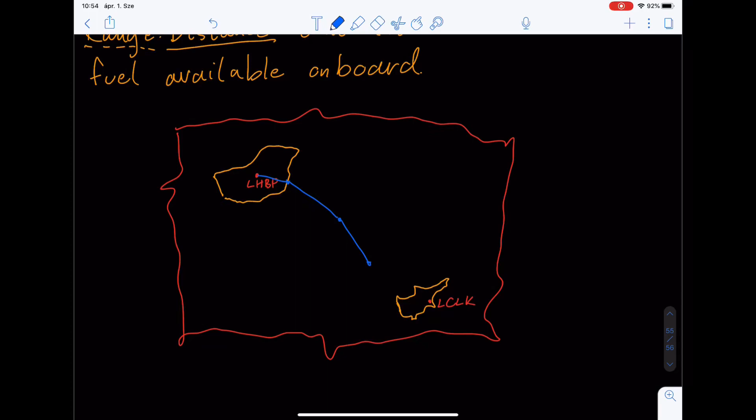So when you plan a flight, in the flight planning stage, you would look, for example: you're in Hungary, I'll try to draw the best Hungary that I possibly can, and you're taking off from Budapest, and you're going all the way down to Cyprus. So you plan this flight on the map, as a two-dimensional image. Of course there's a whole bunch of other countries in between. The point is that you're taking off, you go through other countries, through a whole bunch of points, and you end up landing at your destination.

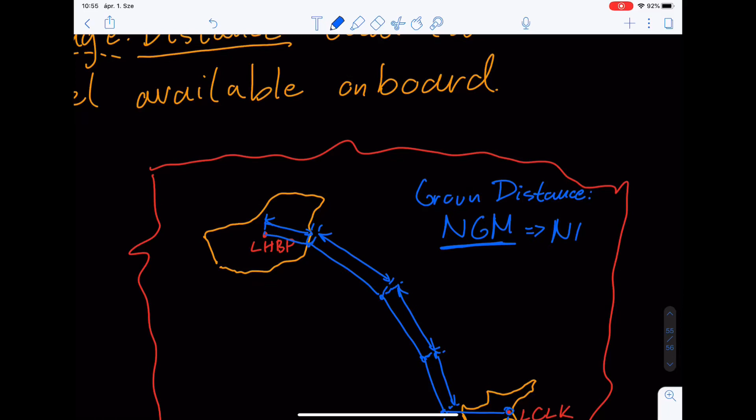So what you do is measure these individual distances and you add them up. And then you receive a distance. We call these distances measured on the ground, so this would be a ground distance. And we usually measure the ground distance in what is known as nautical ground miles, so basically nautical miles measured relative to the ground. Initially this is what we're interested in. We want to fly from A to B, I measure the lengths of the different legs on the chart, and this is going to give me nautical ground miles. So this is the first type, a ground range of the aircraft.

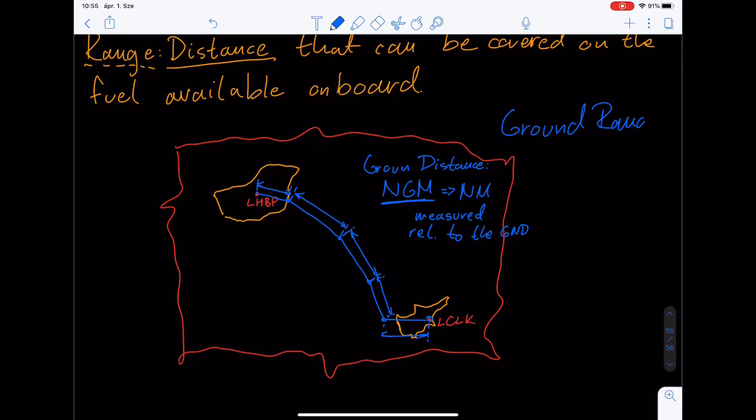And these are the two ones which we need to measure together, like the ground range of the aircraft. Can it cover the ground range or the ground distance from the A to B flight, right? So these distances, can it cover it? If it can, of course, you can fly to this aerodrome. It's still within your ground range.

But in reality, the airplane is not flying on the ground. It's flying in the air, right? And the aircraft is within the air mass, so this mass of the atmosphere, it's made up of the air particles all around, and the airplane is flying within that. It's flying within this air mass. However, this air mass too moves relative to the ground.

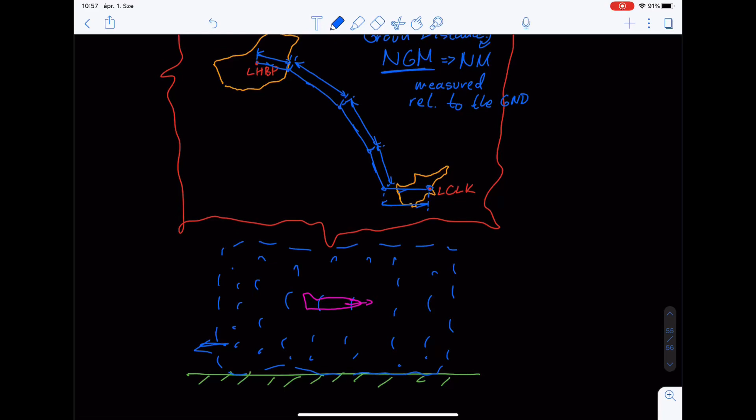So the aircraft usually flies a distance within the air mass. However, based on the type of wind, in this case we show that the aircraft is moving from left to right relative to the mass of air, and the mass of air is moving on this little drawing from right to left, right? You can see that here. So it's a headwind component for the aircraft.

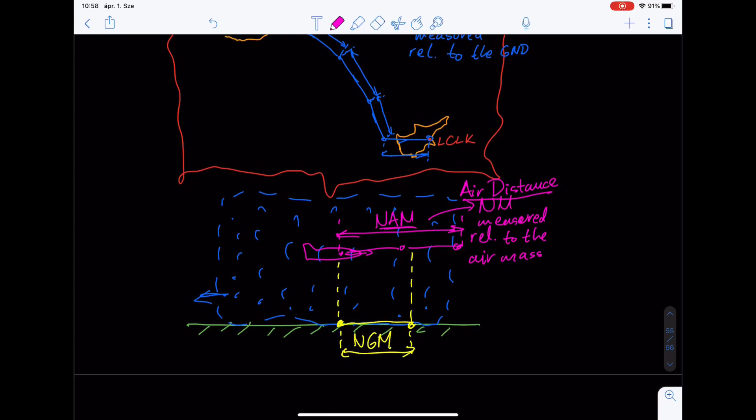So relative to the ground, when you add up these two motions, you would get something like this. So your displacement relative to the ground, this would be the nautical ground miles, and this would be the nautical air miles. So the distance, nautical mile measured or covered relative to the air mass, right? That's nautical air mile. And so therefore this is going to be an air distance. Air distance is the motion of the aircraft relative to the air.

And usually this is the one which we will be able to calculate initially, because this is only dependent on the aerodynamic properties of the aircraft, the type of propulsion, and basically the variables of the environment, like outside air temperature, pressure, altitude. So therefore, usually the density, right, and also maybe the humidity.

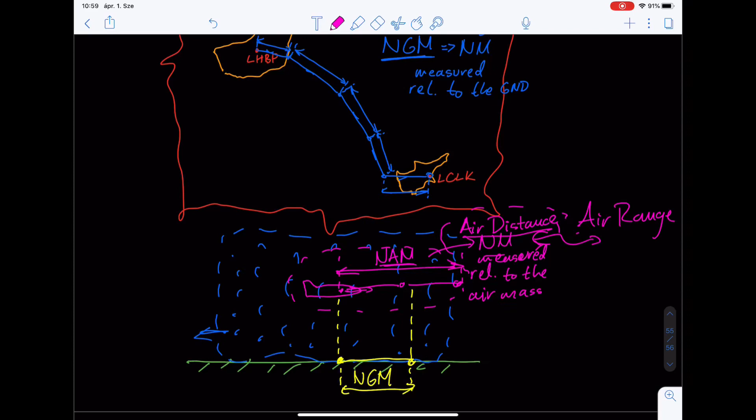So we usually calculate first this air distance, which is also going to give us like an air range, and we compare it to the ground range, which is given by the planning stage. And we also call this ground distance or ground range. We also call this still air distance,

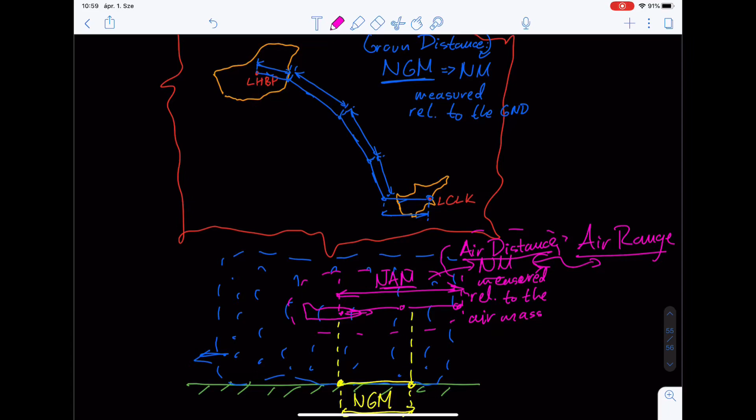because if there is no wind, if the mass of the air in which the aircraft is moving is not moving relative to the ground, in that case, the motion of the aircraft against the air mass is going to be the same amount relative to the ground as it is relative to the air. So in that case, the two would be the same, right? So the distance which the aircraft covers relative to the ground would be the same as the distance the aircraft covers relative to the air.

However, there is always some wind, especially aloft. Even if it's almost a calm wind situation near the surface, because of the boundary and the surface friction effect, at higher altitudes there's usually some sort of wind, which is usually much stronger. And so therefore, in almost all cases, we cannot neglect the effect of the wind.

Okay, so when it comes to range, as we saw, there's going to be two types of ranges. The first one is the so-called air range, and is measured in nautical air miles. And the second one is the ground range, which is measured in nautical ground miles. Okay, so these are the two ones.

So range is a very general term, and as you can see, it's highly dependent on the fuel available on board. So it's dependent on how much fuel you take with you. So in a general consideration, it doesn't really give us much information about the capability or the performance of the aircraft, I would say, right? It's not giving us much information because it's heavily dependent on how much fuel you have on board.

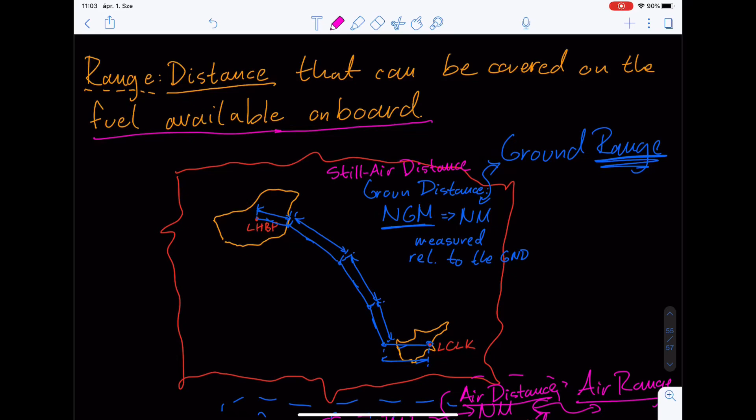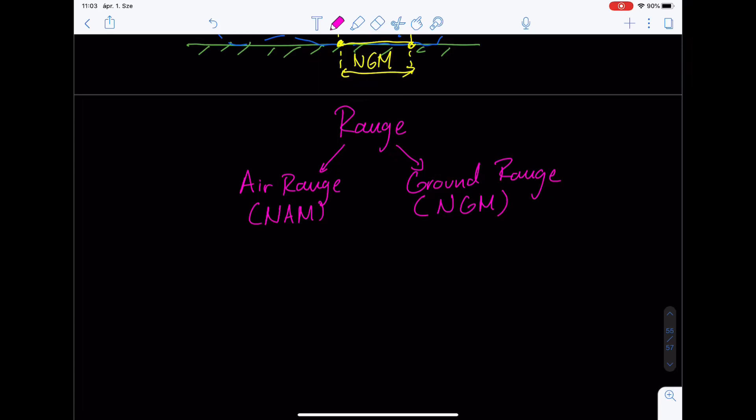And this is the reason why we have expanded the definition of range a little bit. And instead of using simply the range, there is a definition known as the specific range. So the next definition is the specific range, and by definition it is the distance flown or covered per unit amount of fuel.

And this is more interesting for a given airplane, right? It's going to tell us, from a unit amount of fuel, how much range can I cover? So it's a pretty good indication of the performance of the aircraft, right? Because if the specific range is high, it means that I can cover a bigger distance from the unit amount of fuel. So therefore, it doesn't matter whether I bring little fuel or more fuel. Of course, it's going to affect the range, but the specific range should be pretty consistent.

And you know, the better airplane would have a better specific range. And that's a caveat. If you have a lesser specific range, it means you might have to fuel more on that given airplane with a lesser specific range to get the same amount of range, which is going to cost a lot of mass.

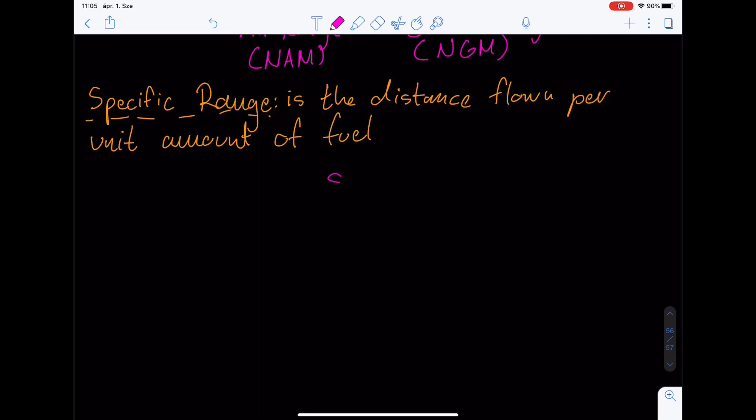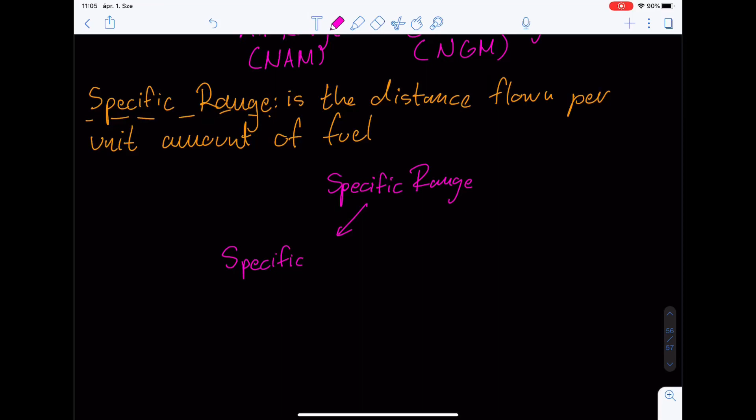So based on the type of range that we're talking about, the specific range as well, we can basically split it into two categories. So there are going to be two types of specific range. There's going to be the specific air range. Specific air range is usually abbreviated as SAR, which is measured, well, we're going to see the unit in a little bit, in nautical air miles per pound or kilogram of fuel, basically.

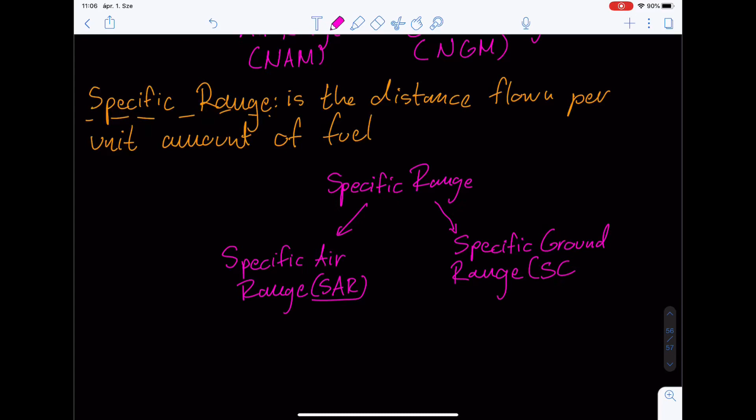And we're going to have the specific ground range, which we're going to index as SGR, specific ground range. And the unit for this one is going to be nautical ground miles per pound or kilograms of fuel. Right. So as a general dimension, you would have the specific range. So this is neither air nor ground. This is just the dimension.

So the dimension of the specific range would be nautical mile per kilogram, right? So it's the distance you can cover from the unit amount of fuel. It tells you how many nautical miles the aircraft can fly from 1 kilogram of fuel. So what we're gonna do next is divide by time, both sides, or multiply with 1 over time over 1 over time. So it's basically multiplying with 1.

So what we're gonna do is nautical mile over time over kilogram. Well, instead of time, because this would be dimension analysis, let's use hour. That will be the System International. Well, no, the System International would be the second, but let's use hours. So nautical mile per hour over kilograms per hour. Okay, so what we're gonna get. So nautical mile per hour is a distance over time.

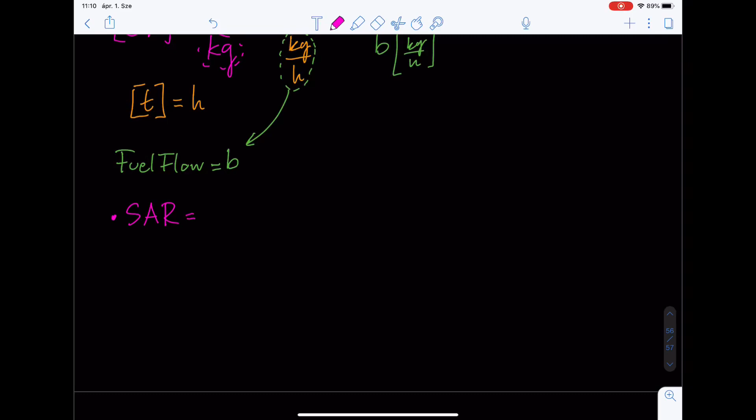So how can we take it further for the specific air range and the specific ground range? For the specific air range, what is the velocity against the air mass? Which velocity of the aircraft can be measured against the mass of air in which I'm flying? It's going to be the true airspeed. So the specific air range is going to be the true airspeed over the fuel flow, which gives us back the initial dimension analysis.

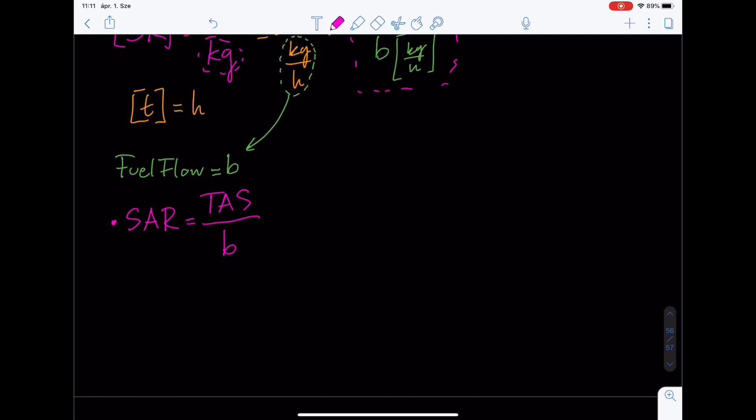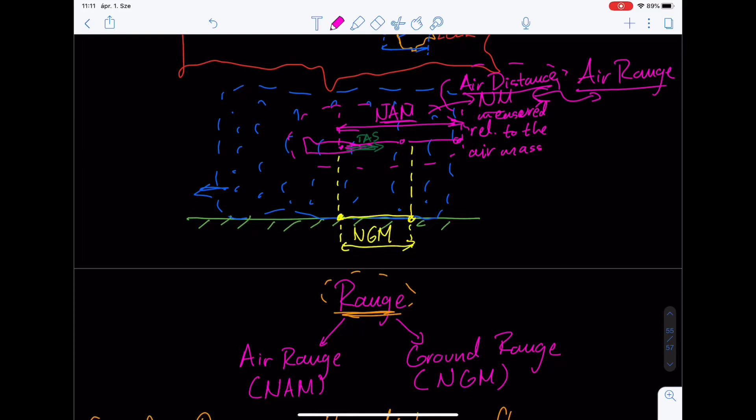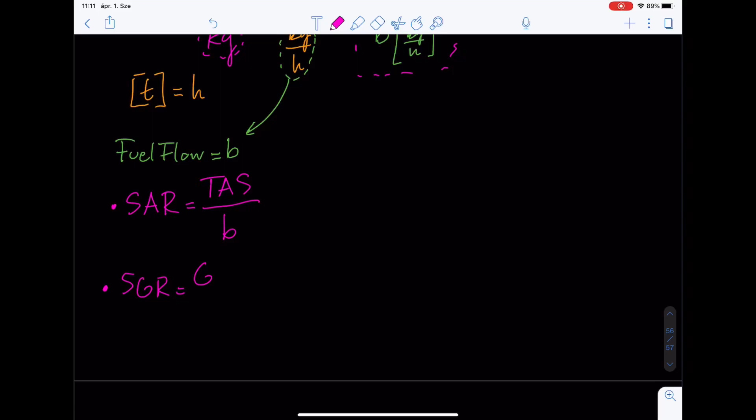And on a very similar analysis, the specific ground range is going to be a velocity relative to the ground over the fuel flow. So which velocity do we usually have relative to the ground, which takes into account the wind? Of course, the ground speed, the speed of the aircraft measured relative to the ground. So it's the ground speed over the fuel flow. This is the formula for the specific air range, and this is the formula for the specific ground range.

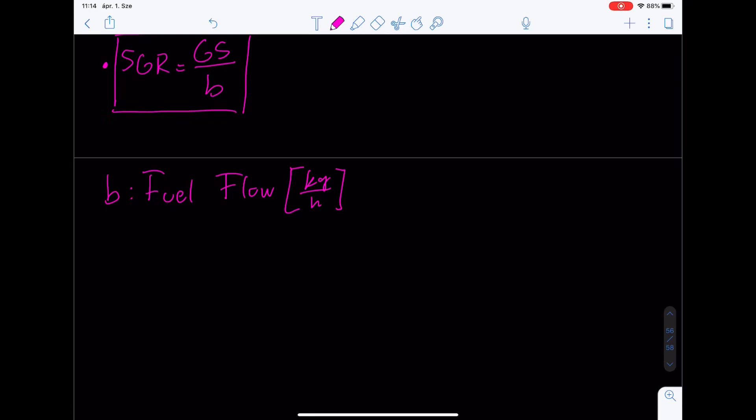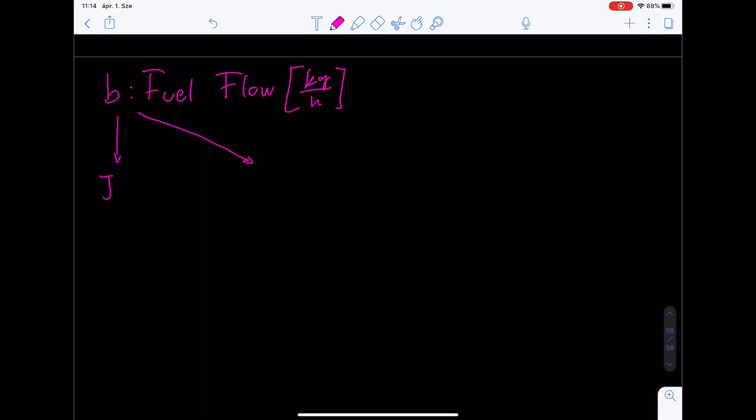Okay, so let's talk about the fuel flow, whose dimension was kilograms of fuel per hour. Generally speaking, how we express this fuel flow is going to be a little bit different for the jet and for the propeller-driven aircraft. So we'll have to make two distinctions again here: one for the jet, and the other for the propeller-driven aircraft.

Right, so for the jet, this fuel flow is going to be proportional to the thrust which is generated. And for the propeller-driven aircraft, this fuel flow is going to be proportional to the power. And the main function of this fuel flow is the specific fuel consumption for the type of aircraft, and we'll see this in a short bit.

So in both cases, it's always a function of the specific fuel consumption of the aircraft. But I think it makes sense why, right? How much fuel is the aircraft consuming is going to be determined by the specific fuel consumption of that aeroplane, basically of the type of engine. So a better, more efficient engine is going to have a lower specific fuel consumption and a lower fuel flow.

And if you look at the previous formula, if you lower the fuel flow for either case, you're going to get a higher specific range, which is great because it means that for a unit amount of fuel, you're going to be able to cover a bigger distance, more nautical miles. And a more outdated, less efficient engine would have a higher specific fuel consumption, so therefore a higher fuel flow, right?

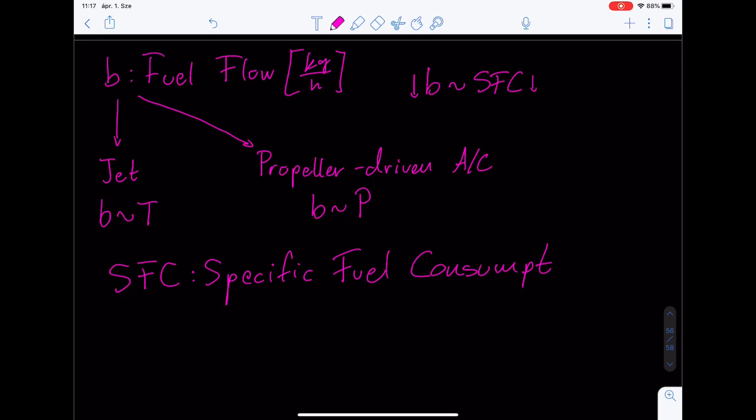And again, for the jet, we usually look at the thrust specific fuel consumption. And for the propeller-driven aircraft, we're looking at the power specific fuel consumption. So usually we say SFC, specific fuel consumption.

We like to use specific for everything, because you could say my aircraft is consuming 200 kilograms of fuel per hour. Is that good? Is that bad? It depends. If it's a little Cessna, it's probably pretty bad. But if you're talking about a jumbo, it's probably not even enough, right? So 200 kilograms of fuel consumption doesn't really tell us much.

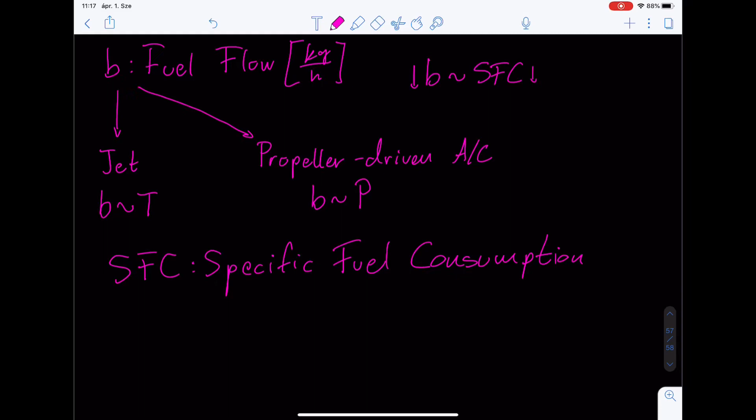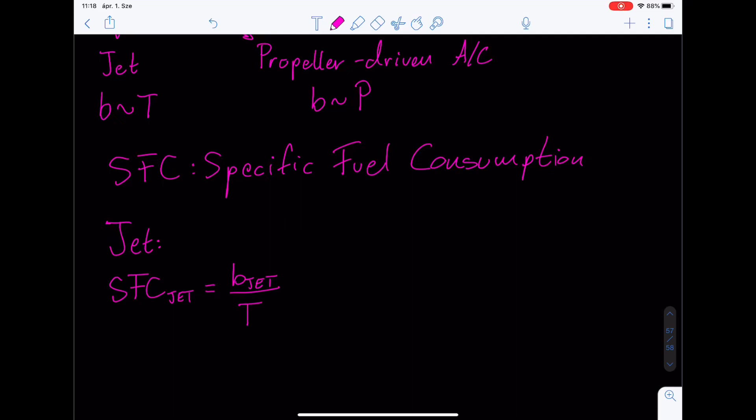So this is why we're using the so-called specific fuel consumption. The thrust specific fuel consumption for the jet is the fuel flow, which we're also going to index as the jet, over the thrust. So how much fuel flow, in kilograms per hour, do I need to get a unit amount of Newton?

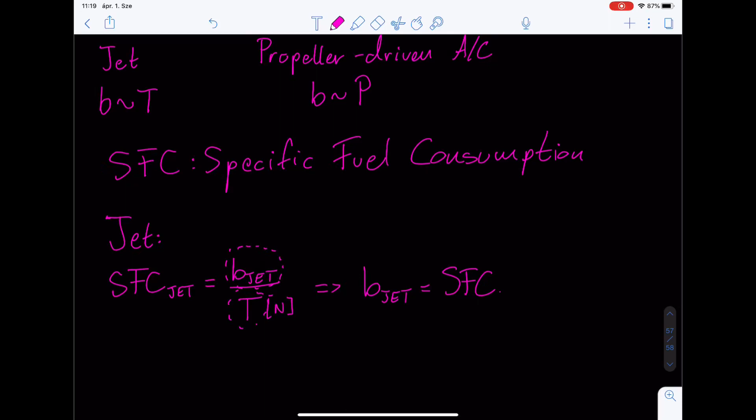And of course, the lower the amount of fuel flow with which I can generate the unit amount of thrust, the better. And this is independent of the size of the aircraft, because if you want to get the fuel flow out of the picture, the fuel flow is going to be the specific fuel consumption for the jet times the thrust.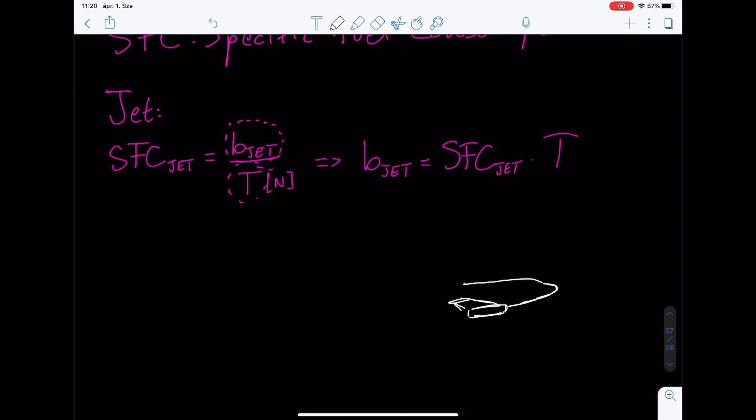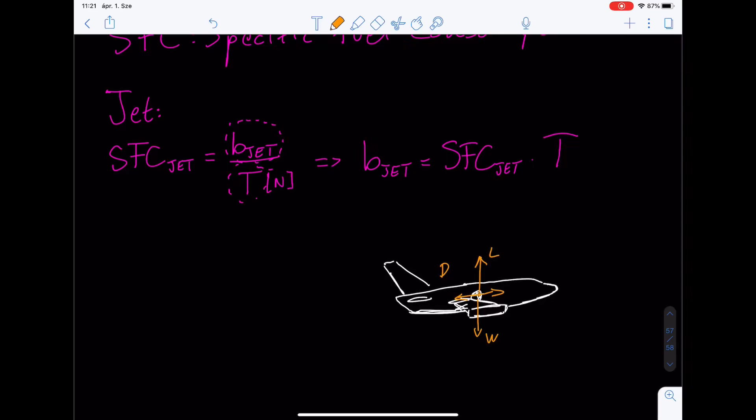So let's look at the example of a teeny tiny 737-200. It has this very cigar-looking engine, and it's kind of a small airplane. It has a center of gravity and a given, little weight. For that weight it needs to generate a given amount of lift, which generates a given amount of drag, and this drag needs to be counteracted with a given amount of thrust.

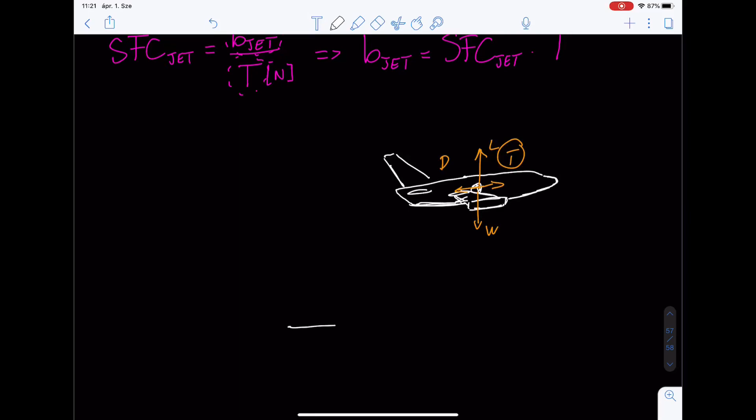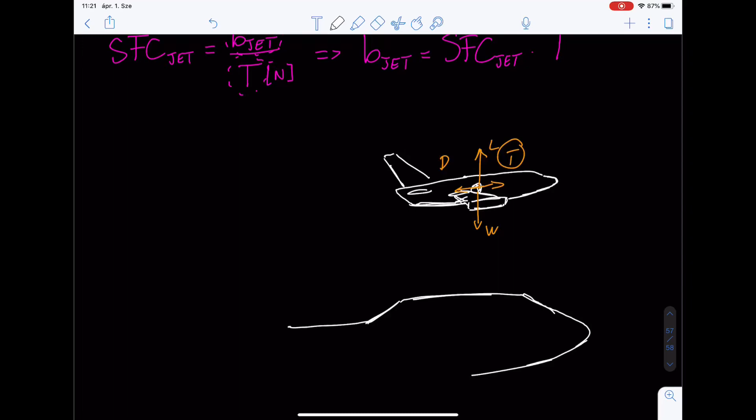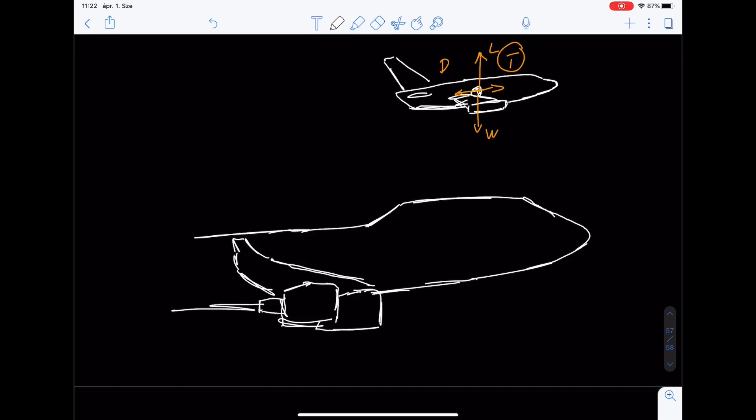But let's look in comparison, and I'll try to get the sizes right, at a 747. I'll try to get the shape of the nose right. And it's this very huge airplane. I cannot stress the size here. It's probably even longer; it cannot even fit on the picture. It's that big. And these are the same metrics used for both of them.

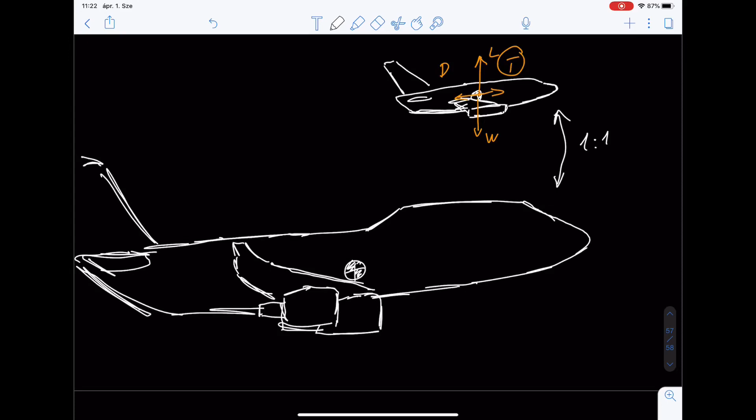So it's going to have a center of gravity as well, and its weight is going to be much bigger. So it needs to generate a larger lift force, therefore a larger drag, and therefore a larger amount of thrust. So the thrust for the 747-8I is going to be much larger than the thrust generated by the 737-200. The thrust is larger, so therefore the fuel flow is going to be larger.

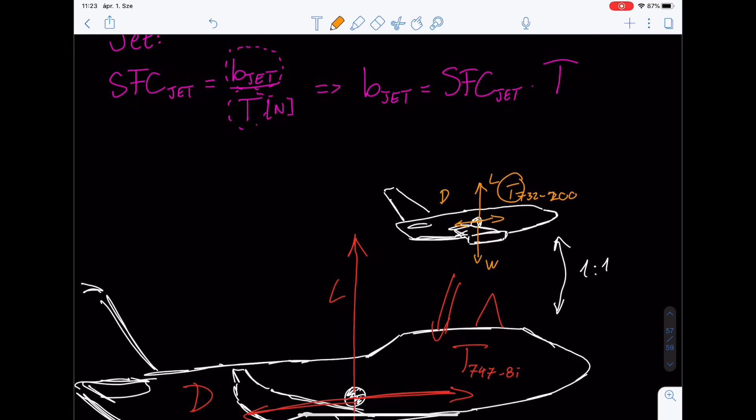Right? So if you want to compare them, if the thrust of the 747 is larger than the thrust of the 737, what you're going to have is that the fuel flow of the 747, which is the specific fuel consumption times the thrust of the 747, is probably going to be higher than it is for the 737, which is the specific fuel consumption of the 737 times the thrust generated by the 737.

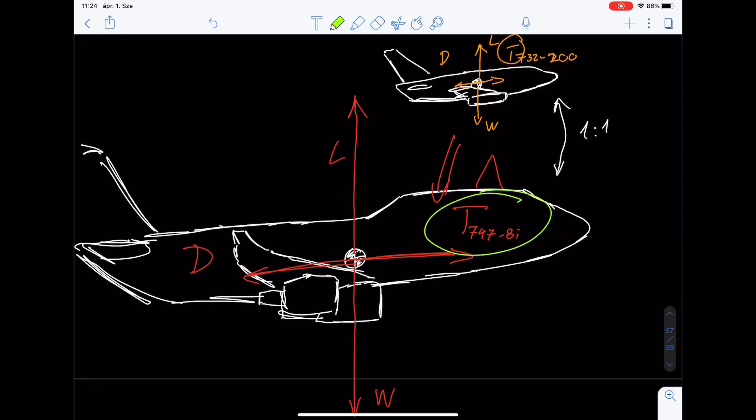Right. So in reality, you can see that the fuel flow is going to be much higher. So it's going to require higher fuel flow to generate this amount of thrust. However, the specific fuel consumption of the 747 might be lower than the 737, because this is the newest type of 747 engine, and it's very high tech, very high bypass ratio engines, very efficient.

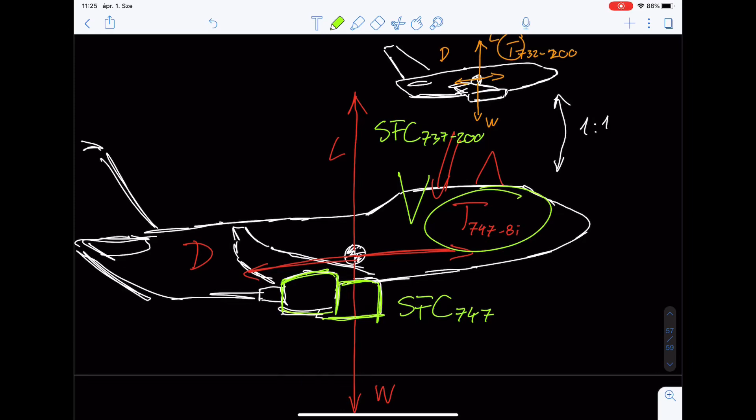So actually, it can so happen that the specific fuel consumption of the 747 is actually less than the specific fuel consumption of the 737-200, which was very outdated, mind you, with these very old, very nasty, very loud single bypass or single spool engines, basically. So in that case, the fuel flow is actually higher. However, the specific fuel consumption is lower than for the 737. The thrust is so much higher than that required for the 737 that the fuel flow is going to be higher.

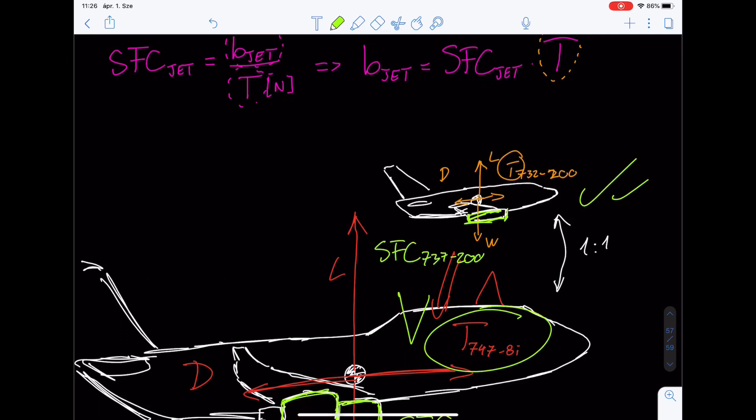But if the fuel flow is higher, it doesn't mean that the 737 is more efficient than the 747-8. It just simply means that there's more fuel required, kilograms per hour, to generate this amount of thrust. However, per unit of thrust, the specific fuel consumption of a larger airplane might be more efficient. It simply requires more units of thrust to maintain straight and level flight. So if you multiply that by the thrust required, you're simply going to get a higher fuel flow.

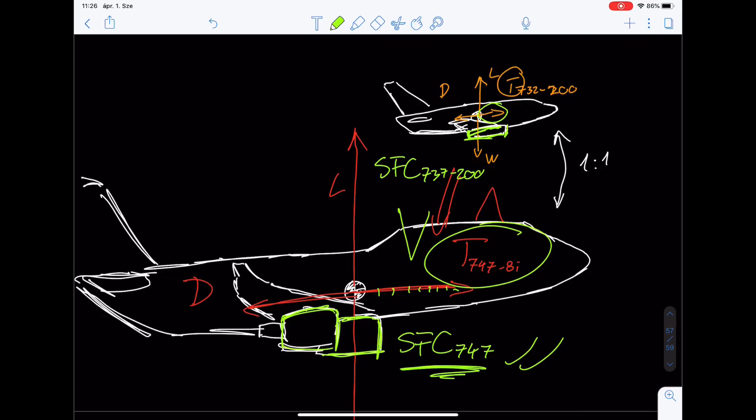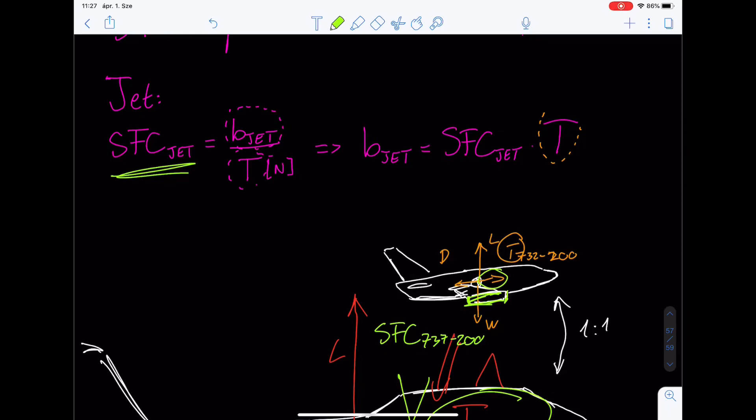So by itself, the fuel flow doesn't give us a direct indication whether the fuel consumption of the aircraft is efficient or not. This is why we use the specific fuel consumption. Okay, I hope that makes sense. So to get back to our initial question, this is why we're talking about the specific fuel consumption for the jet with regards to the thrust, also known as thrust-specific fuel consumption in engineering. In the ATPL, you're not really gonna see it as such. It's just gonna be said that the specific fuel consumption for the jet is the fuel flow specific to the thrust, so divided by the thrust.

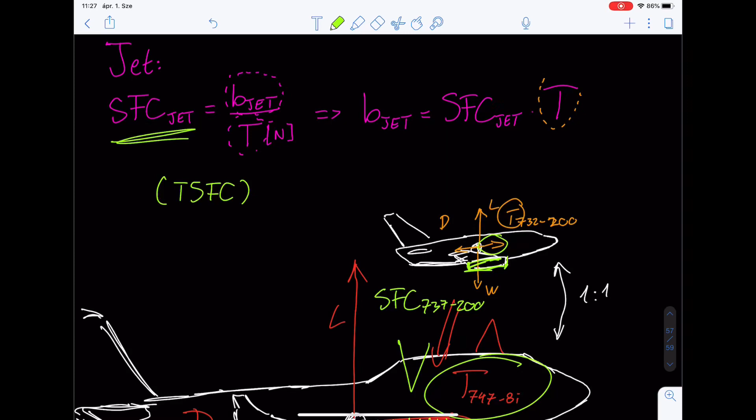So again, fuel flow, kilograms of fuel per hour, over the unit amount of thrust it generates. And from this, a very important formula: the fuel flow for the jet is going to be the specific fuel consumption, which is engine dependent, whether it's an efficient engine or not, what's the bypass ratio, and so on. It's a very complicated mechanical process, which we take into consideration as the specific fuel consumption, times the thrust. Usually we also call this the thrust required, and we're going to see later why that's important.

And for the propeller driven aircraft it's very similar. For propeller driven aircraft, the specific fuel consumption for the prop is not specific to the thrust, but rather the power, right? So the fuel flow for the prop is specific to the power it generates. If we express this, the fuel flow for the prop is equal to the specific fuel consumption of the propeller-driven engine, which is again an engine consideration, times the power it generates.

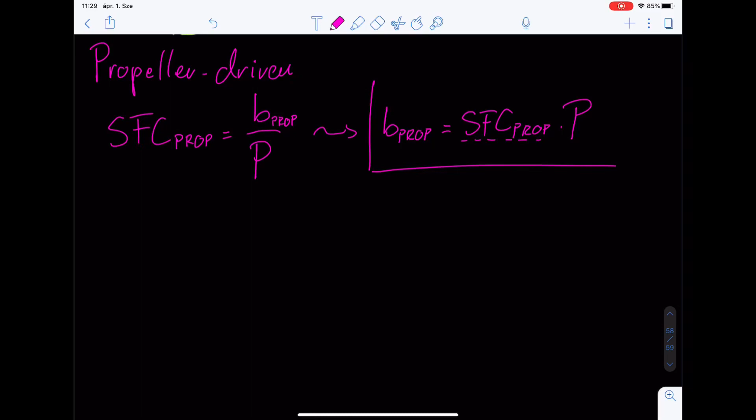I'm not going to go through the whole detail like in the previous case, but it's the same case. You might have a bigger aircraft, bigger mass, bigger power required, so you're going to need bigger power available, and therefore a higher fuel flow. This is why we look at the specific fuel consumption instead of the fuel flow, because a larger airplane is going to have a larger fuel flow. However, the larger aircraft can still have a more efficient engine, so the specific fuel consumption, which tells us the fuel flow required to generate a given amount of power, can be lower. This is what we use for propeller driven ones, the same exact logic as we saw for the jet.

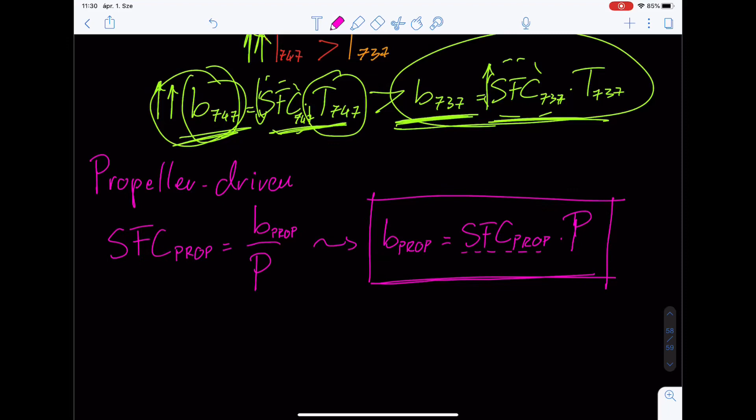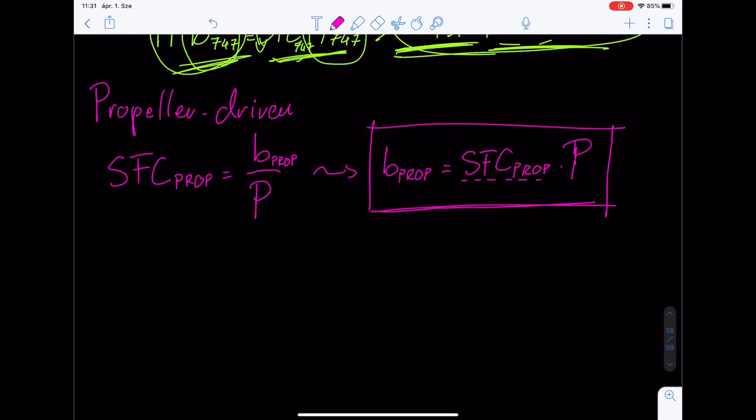It's the same exact logic, and this is also a very important formula that we're going to use. And so for the turbojet engine, we can also say that the specific fuel consumption is the lowest, so the most efficient, usually at lower air temperatures, and usually when the engine is running at its design RPM, which can be reached at usually higher altitudes. But for our consideration, for both the jet and the prop, we're going to consider the specific fuel consumption to be a constant.

Okay, so let's examine the specific air range for the jet aircraft. We said that the specific air range is going to be the true airspeed over the fuel flow for the jet. The true airspeed is just going to be the true airspeed. However, the fuel flow for the jet, as you remember, is going to be the specific fuel consumption times the thrust. So we can substitute that into the equation. So it's going to be the true airspeed over the specific fuel consumption times the thrust.

Right. And from this equation, if we wanted to write it out in complete, this is the specific air range for the jet, and it is the true airspeed over the specific fuel consumption times the thrust. Okay, so what I want to do with the specific air range is I want to maximize it. So how do I find the maximum of the specific air range for the jet? I have to find the maximum of the true airspeed over the specific fuel consumption times the thrust.

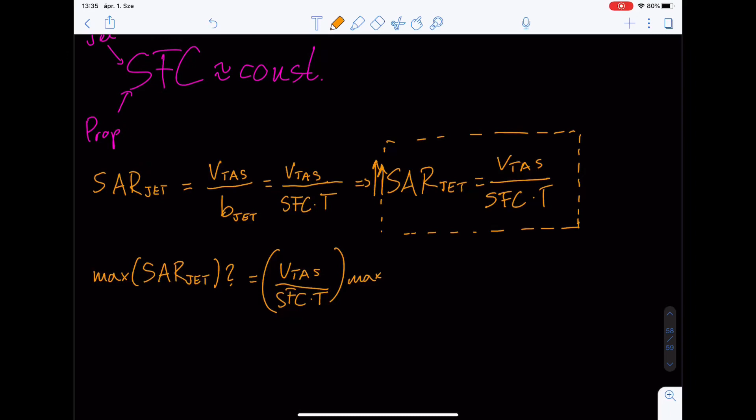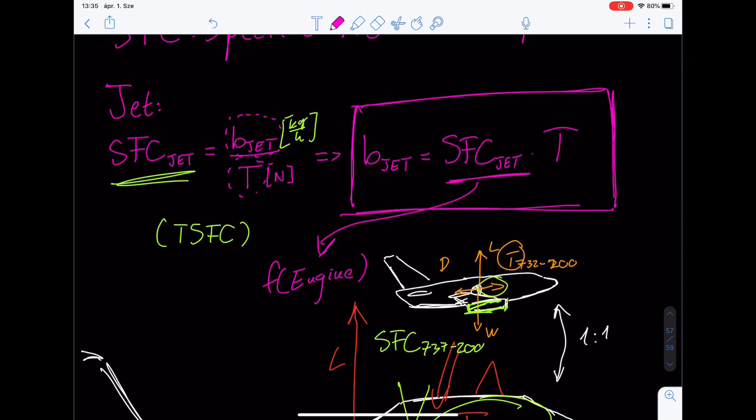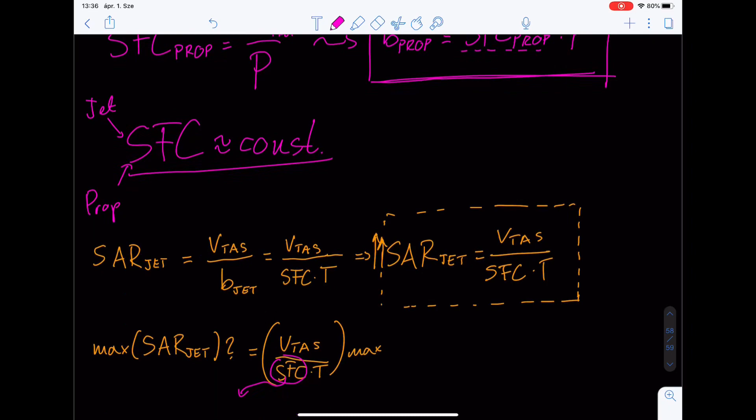We said that the specific fuel consumption we can consider to be an engine consideration, and we also said previously that we will presume it to be a constant. I can't find where we said that, but I'm definitely sure that we did. Oh, there it is. So the specific fuel consumption we presume to be a constant, so that basically goes out of the question. That means, simply speaking, that the specific air range is going to be maximum where the specific fuel consumption is minimum. However, I still want to find the true airspeed over thrust maximum.

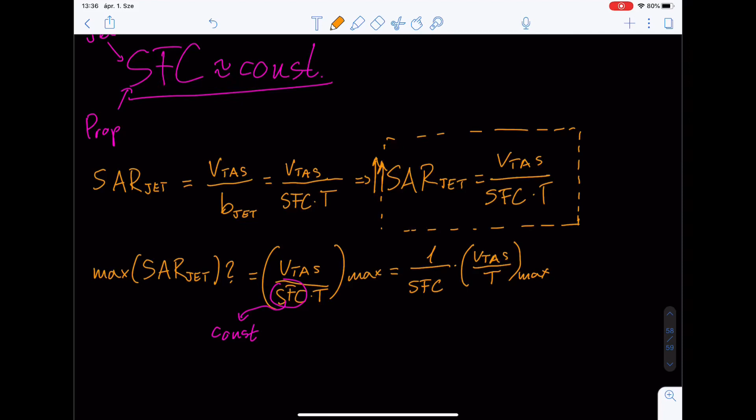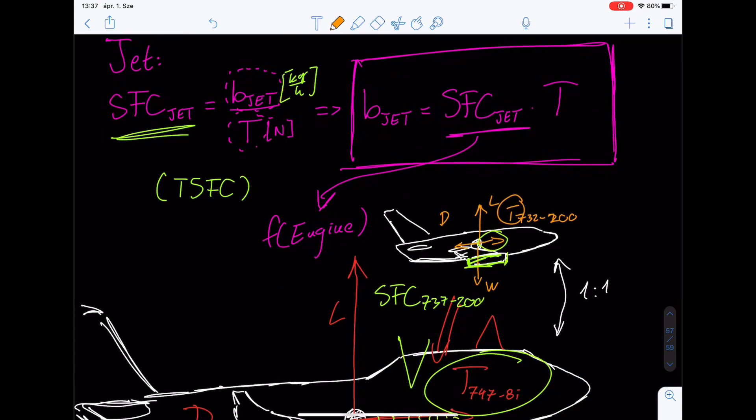Okay, so interestingly, we're talking usually about cruise condition. In cruise condition, the thrust is going to equal the drag. So at this point I can substitute the drag in place of the thrust, because as we said, it's going to be equal to the thrust required. So I can further take this equation and say 1 over the specific fuel consumption times the true airspeed over the drag, maximum. Okay, so I have two different variables.

So how can I maximize the function? Well, from this point of view, I want to maximize the true airspeed to get the highest specific air range, right? Because at the highest straight and level speed that I can achieve, I'm going to get the maximum specific air range. So from the true airspeed, I would want the maximum amount. That would be the Vmax straight and level, if I only optimized this part of the equation.

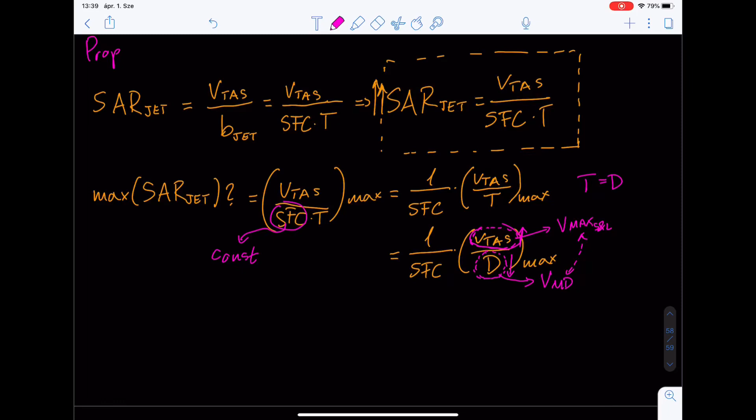The drag is in the denominator of the fraction. So if I want to maximize the entire fraction, I want to minimize the drag. Which speed does that occur in? At V MD. Okay, so now I have these two conflicting speeds: V MD, which is a fairly low speed, and the Vmax SNL, to maximize this function. So how can I satisfy both of them at the same time? The answer lies in not optimizing each part of the fraction individually, but optimizing the entire fraction.

So what we're doing from now on is trying to find the maximum of the true airspeed over the drag. And we're going to do a little trick here, because we're going to say that the true airspeed over the drag is maximum where drag over the true airspeed is minimum. And this is a true assumption, and as you will see graphically in a second, it's going to make sense. Okay, so this is what we're going to be optimizing for. So let's plot the drag curve of the jet. On this axis we have the drag, or thrust required in some literatures, and here we have the true airspeed.

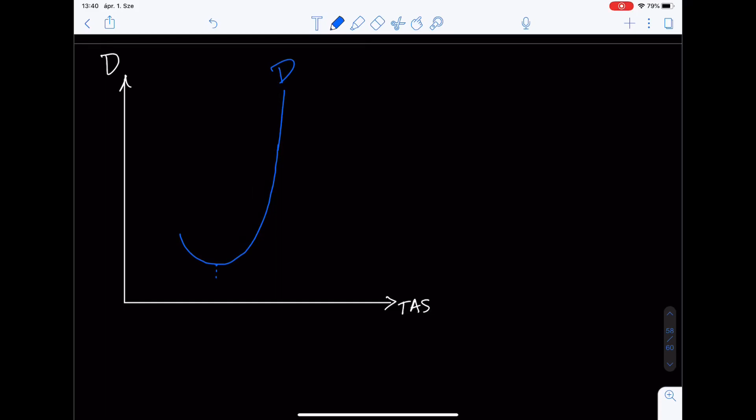Okay, so we have the drag curve looking something like this. So this would be your drag curve. It's kind of steep, but there you have it. Somewhere approximately here you would have the VMD, and you know where the drag curve meets the thrust curve. At the top, depending on the thrust setting, you would have the Vmax SNL.

And it's very definite that the optimum speed, so V max range, VMR, is going to be in between these two. But exactly where, right? And so this is what we're going to calculate from right here. So we said that we need to optimize for the drag over the true airspeed. So let's examine that.

At any given point, for example right here, if I connected the origin of the coordinate system and this given point at this given speed, what I see is that the vertical component at this point is basically equal with the drag achieved. That's what you can read off the vertical axis. So this would be your drag. And the one on the horizontal axis would be your velocity, your true airspeed.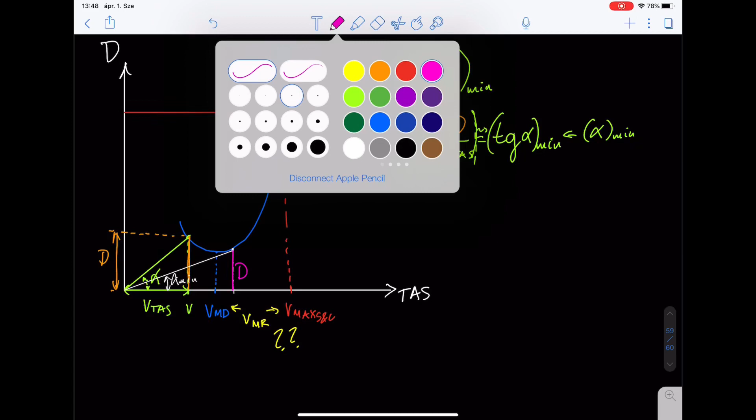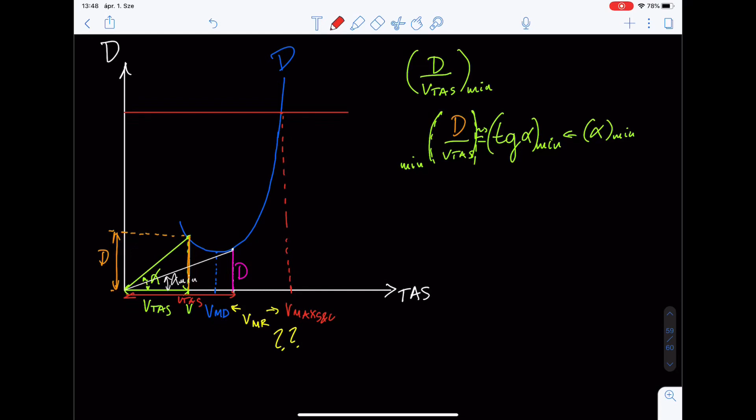The correct answer is that there's only one single point where this is minimized, and that would be the tangent of the curve, right? Because at this point you would reach the alpha min, and therefore your drag over VTAS, this leg right here, is gonna be the least amount. After this point, at any single point, and you can try this out on multiple points, if I pull the point here, it's going to be higher.

It's very visible, right? What happens if I pull straight to the VMD? It's bigger. So what happens if I go beyond, to the right of this point? Again, it's going to start getting bigger through all points of the curve. But this one, as you can see here, is reaching its minimum. And if it's a lower one, it's still gonna be bigger.

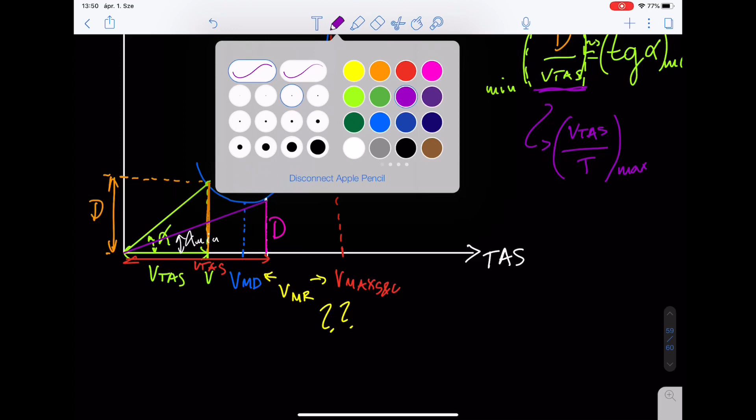Right, so this is why you reach the lowest point for the alpha angle, therefore the tangent, therefore the drag over the true airspeed, so therefore a maximum amount of true airspeed over the thrust, and this is what we call VT, or the best thrust over velocity ratio, which is 1.32 times VMD. And we're going to say that this is the max range speed for the jet in still air conditions.

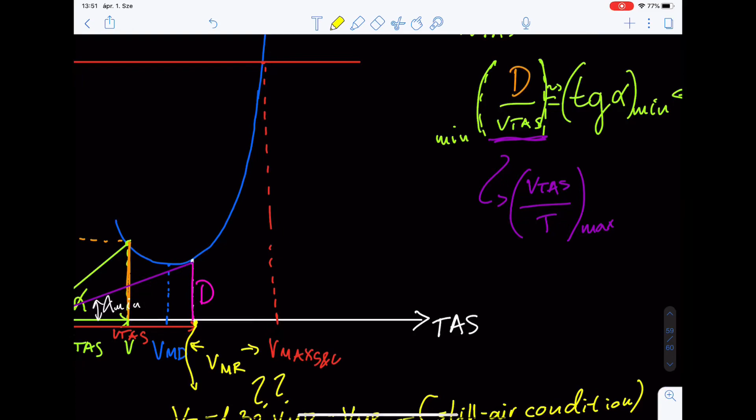So therefore the maximum specific air range, and this is the caveat for it. In the tangent for the jet you reach the lowest amount for this alpha angle, where the alpha influences the tangent alpha, and the tangent alpha is the drag over the true airspeed, which influences the true airspeed over the drag, which of course influences the specific air range.

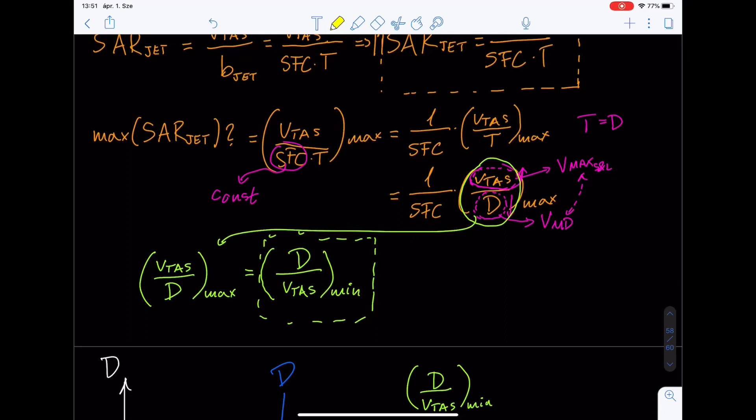So where you reach the lowest point for the drag over true airspeed, you reach the highest value for the true airspeed over thrust for the specific air range formula, and therefore it's going to maximize the specific air range. So at VT, approximately 1.32 times VMD, the tangent of the drag curve is where you have the max, the highest specific air range for the jet.

If you fly with a higher or lower speed, this angle is going to get larger, and therefore the tangent is going to get larger, so it's going to get further away from the optimum. Okay, so again, there you have it for the jet. And in the next video, we're going to continue with the best specific air range for the propeller-driven aircraft.